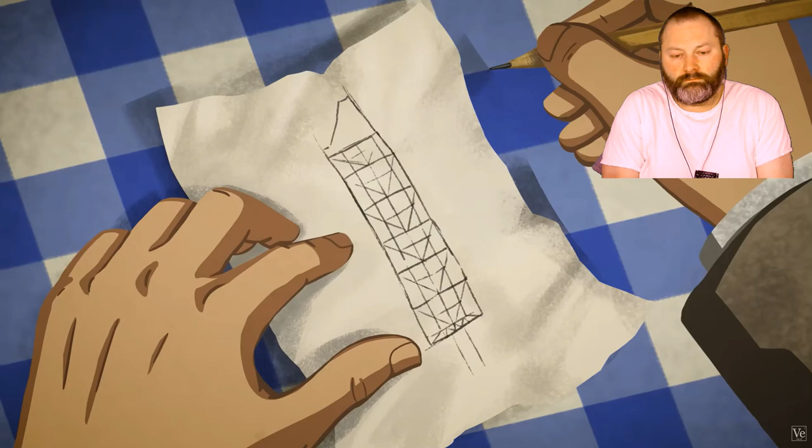a 17-ish minute video. This is Citicorp Center. In the summer of 1978, it had been open for less than a year when its structural engineer Bill LeMessurier made a terrifying discovery. His cutting-edge skyscraper, an engineering marvel, had a fatal flaw.

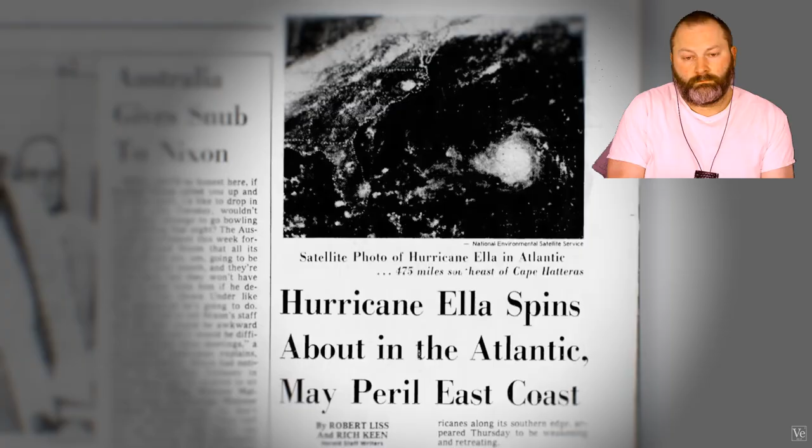Winds of just 110 kilometers per hour could cause it to collapse in the middle of Manhattan, potentially killing thousands. Over 200,000 people lived and worked in the surrounding area, and hurricane season was only weeks away. Here I am, the only man in the world who knew this.

This thing is in real trouble. LeMessurier faced a stark choice. He could stay silent and hope for the best, or he could try to fix it and risk professional ruin and mass panic. But Citicorp Center had a 100% probability of total collapse by the end of the century. How could he save New York from a near-certain disaster? And how was this allowed in the first place?

Veritasium producer and engineer Henry Van Dyke traveled to New York to investigate further. In the 1960s, the financial giant Citicorp was trying to build a new headquarters in Manhattan. Just down the street from their original headquarters was this entire city block, which was up for sale.

Well, everything except for this church, St. Peter's. So Citicorp came to the pastor, Ralph Peterson, and asked, 'What's it going to take for you guys to leave?' And he came back and said, 'We're not leaving. Anything that Citicorp builds has to involve the church as part of it.'

What the pastor wanted was for the church to have its own separate identity. So eventually they agreed on two things. One was to replace this old crumbling Gothic church with a brand new one, which you see in front of you. And the second thing was that the church had to be physically distinct from the new tower. In other words, it had to be completely independent. And again, most importantly, two-thirds of the space above the church had to be free and clear, had to be open.

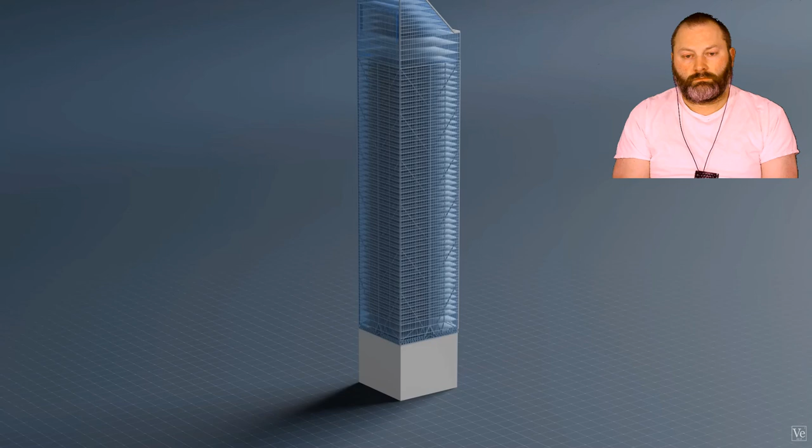The church needed to be in the exact same spot, and they needed to build the tower around it. If they were to maximize the floor area, they would have to notch out one corner of the tower for the church. LeMessurier agreed that could work, but why not notch 2, 3, or even all 4 corners, essentially constructing the skyscraper on stilts?

So it's probably the first time in history that an engineer has come to an architect and said, 'Let's make our job harder for us.'

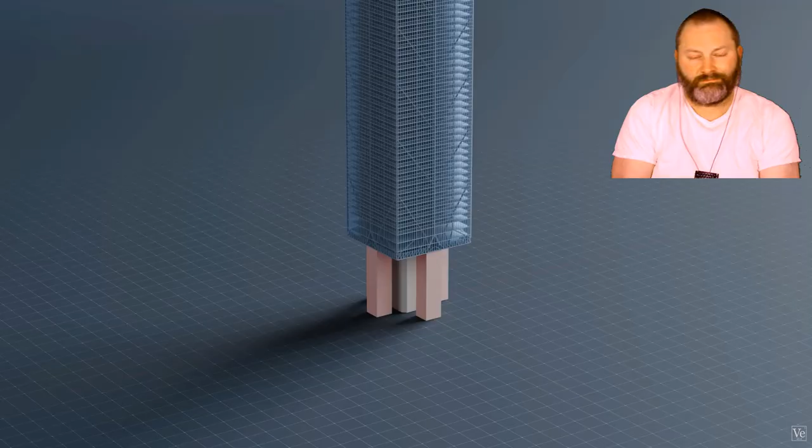The stilts would serve two main purposes. First, they would need to support at least half of the building's gravity load. The rest would be held up by a larger central column. Second, they would need to withstand the load due to high winds.

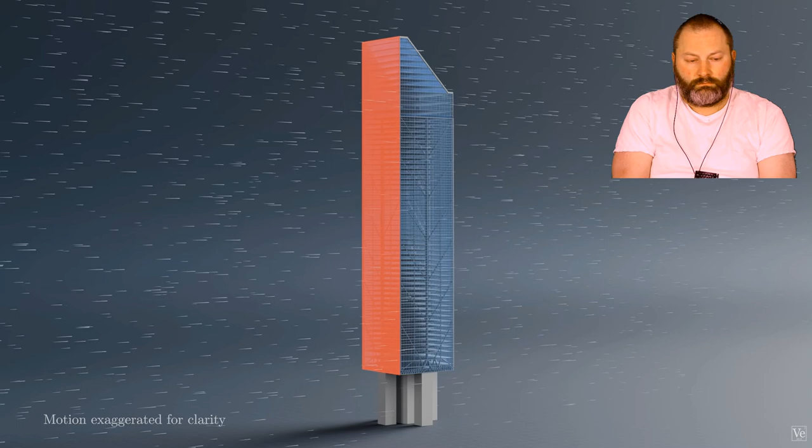But unlike an ordinary structure, the stilts wouldn't be at the corners. They would be at the center of each face. Imagine a chair, and instead of the columns or the supports on each corner of the chair, it's at the midpoint of each side. Obviously, it's not an ideal situation. It doesn't seem very stable. Exactly. So it created an engineering problem.

As LeMessurier considered the problem, he suddenly had a flash of inspiration. He grabbed a napkin and sketched out an idea. He drew 6 layers of diagonal braces up each face of the tower. These chevrons would transfer the forces to the middle of each face and down to the stilts.

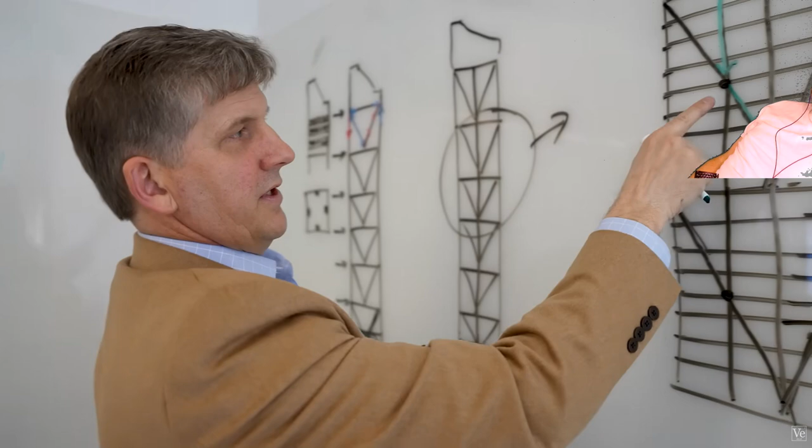Now we have to see the gravity loads, right? But now here's the trick. The gravity loads are coming down the column. When they get to the brace, they need to find their way into the brace. So what you do is you take out that column right there. There is no way that load can jump over and go to that column.

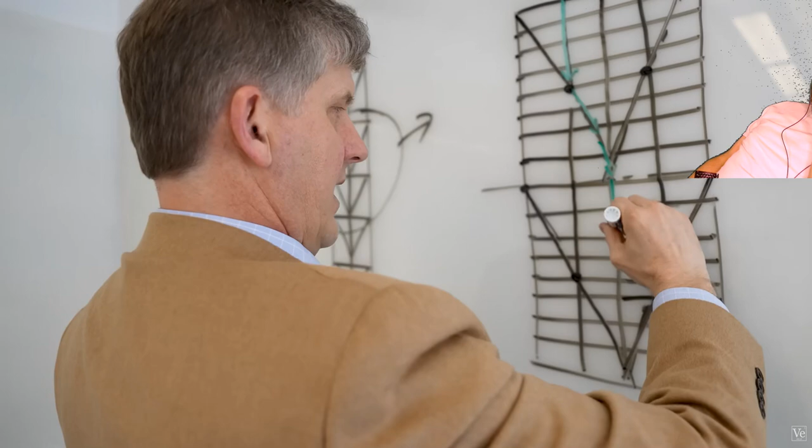And now they're coming down into the braces. They get down to the bottom here, and now they continue to go down. You take that column out, it has nowhere to go except into the brace. By removing the columns at the top and middle of each chevron, every tier acted as a separate unit. They were only connected to the braces and through the central core.

So every 8 stories, half of the gravity load would be forced through the chevrons to the mid-face columns, leading down to the stilts. This particular system was entirely unique, driven by the placement of the columns and the conditions of the building.

When wind hits the left side of a normal building with corner columns... Can I just say, I never would have thought about that. The fear to me is that removing something would make it less stable, instead of how they did it, where the angling forces it to become more stable, driving the stability through the areas where they've got it set up. That is just, I never would have thought of that. That's why I don't do this.

The frame deforms like this. So to reduce this deformation, we could strengthen these joints, but there's a better way. Because beams and columns are much stronger in compression or tension than they are with bending loads, if we add diagonal bracing, they can carry this horizontal load. The beams sort of act like springs, and when they're compressed, they push on the joints. When they're stretched, they pull inwards.

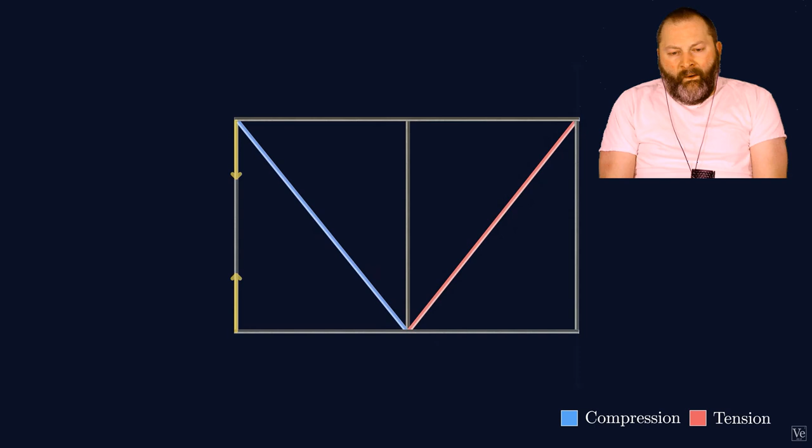With braces like these, the wind load compresses this diagonal and stretches this one. The left column pulls down in tension, and the right column pushes up in compression. Where the braces meet, they both push the bottom beam to the right. This stretches the left side and compresses the right one. But this floor is the top of the next chevron, so this lower section is carrying the force from the layer above it, and the normal wind load from the side. This keeps happening at every chevron, so the wind load builds up as you go down the building.

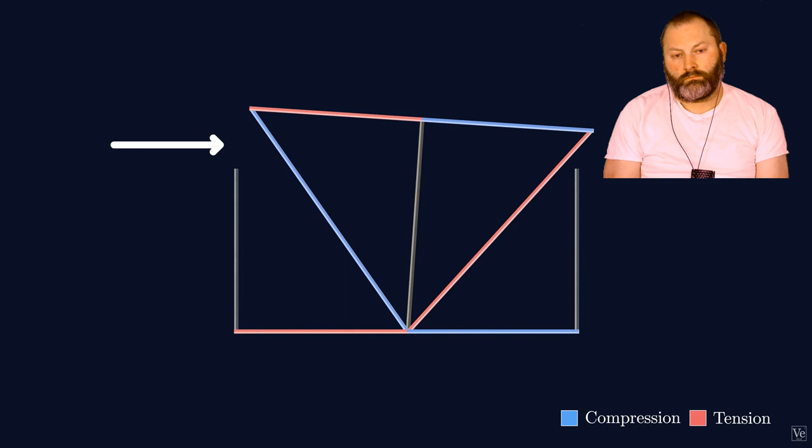But Citicorp can't have corner columns like this because of the gravity load. So in the wind, this entire triangle wants to rotate like this. To prevent that from happening, this chevron pulls down by going into tension, and the far chevron pushes up in compression. The top and bottom beams are again forced into compression and tension.

The wind load ends up wrapping around the entire building, so every chevron works to transfer the wind load to the section below. It's like every chevron is playing hot potato, just passing it along to the next one.

That's ridiculous. That's so cool. Completely ridiculous, because I would have never thought of it.

What is wind? If we made a skyscraper here, out of all these different things, you push with your phone, you get a certain amount of force. But then you push on my phone as well with a certain amount of force, and your phone is also pushing on my phone. And so that's the shear in the building, what we call the building shear.

It increases as you go down the building. At the 10th floor, you may have a smaller force than at the 60th floor, but the total force at the 10th floor is like carrying everything above it, so it's much bigger than what's going on at the 60th floor.

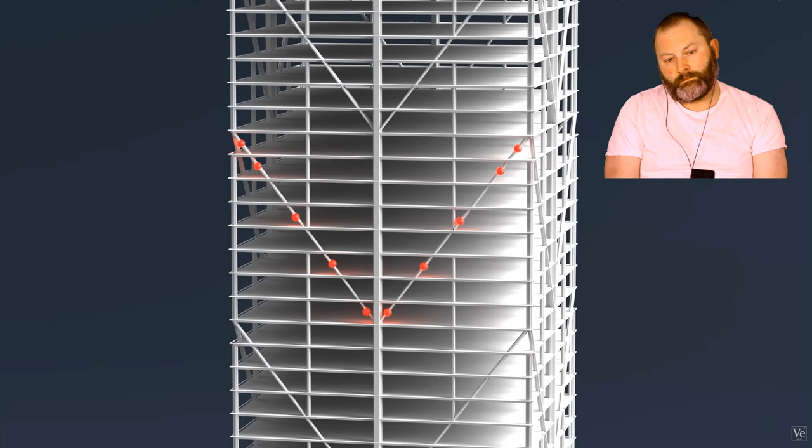So these chevrons were key to Lemessurier's design. But the braces were massive, almost 40 meters long end to end. Even if you could fabricate a steel brace that long, there would be no way to get it through Manhattan. So instead, it was sent in pieces to be welded together on site.

The chevron bracing solved the wind and gravity load issues, but it also created a different problem. Because of the chevron bracing system, they were able to save a lot of money and weight. It was a lighter construct than most other buildings in New York—I think it was 22 pounds per square foot, which is very light.

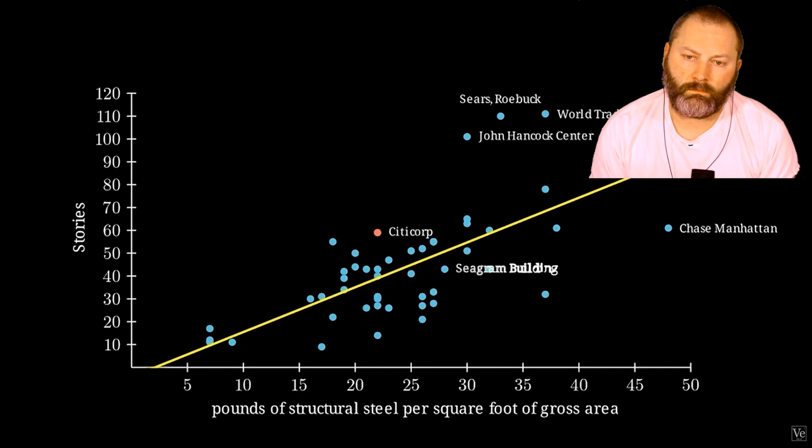Unfortunately, that made the building swayable. It could move in the wind. That wasn't necessarily a structural problem, it was just that it could have been uncomfortable for the patrons. One way to solve this was just to add more structural steel and make it a lot stiffer, but the solution Lemessurier came up with was far more elegant.

He adopted something that had been regularly used in bridges, power lines, and ships, but never before in a building: a tuned mass damper, or TMD.

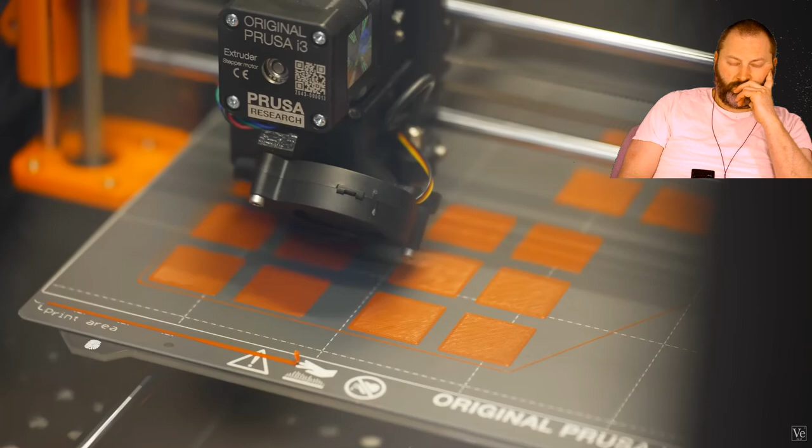So we're here at Stark Laboratories, and I'm not with Iron Man, but instead the Columbia Space Initiative, a student team on campus who has helped us build this incredible tuned mass damper kind of system. We'll use this cart to represent a building. By pulling it back and releasing it, we can excite its resonant frequency. Then we'll put on a little pendulum, an aluminum rod, and a mass at the bottom.

As the building sways, it transfers some of its kinetic energy to the pendulum, which starts to swing. Then some of its energy is dissipated through friction at the hinge. The pendulum and the building oscillate out of phase from each other, so every time the building pulls the pendulum in a different direction, more energy is lost, significantly damping the sway of the tower. But this system needs to be carefully tuned so it has the same frequency as the building itself and the right amount of friction.

First, the mass needs to be at least 1 to 5% of the building's weight to be effective, and we tune the frequency of the TMD by adjusting the length of the pendulum. I assume engineers do math around this, but we're just doing it by feel.

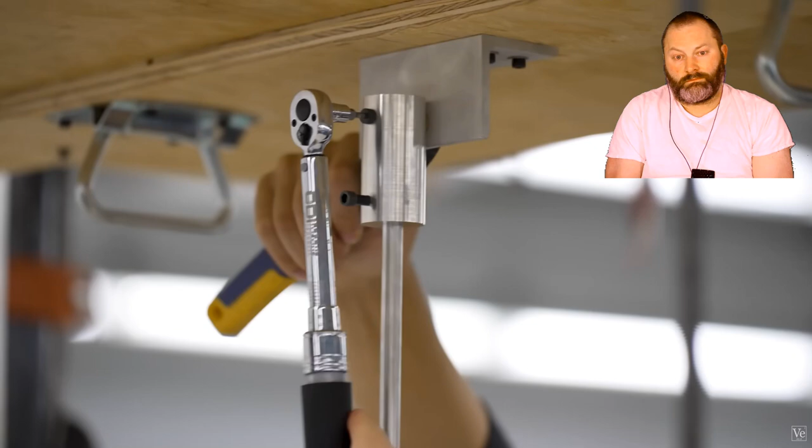Second, by loosening or tightening the bolt, we can tune the amount of damping. We need to dissipate more energy from friction at the hinge to stop the swaying faster. We just tighten this top bolt to add a little more resistance, and we'll see if we can dampen it further now.

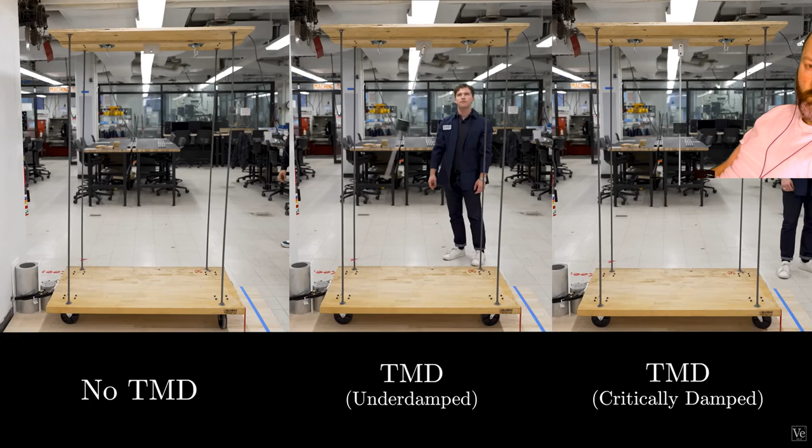Ooh, much different, yeah. That looked great. That was so quick. It is cool when an experiment works.

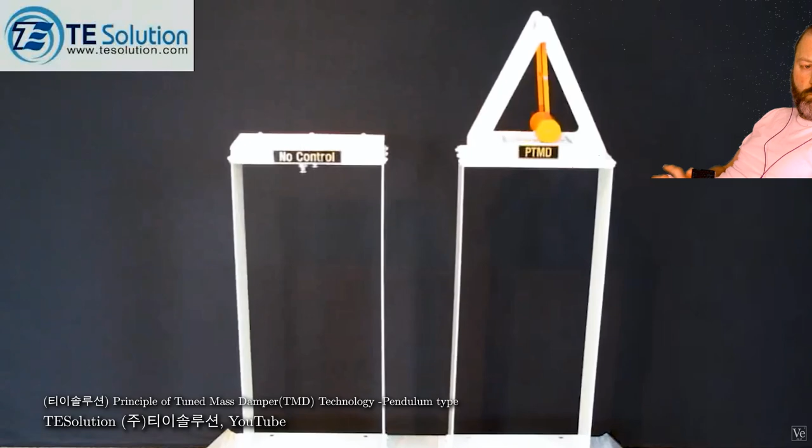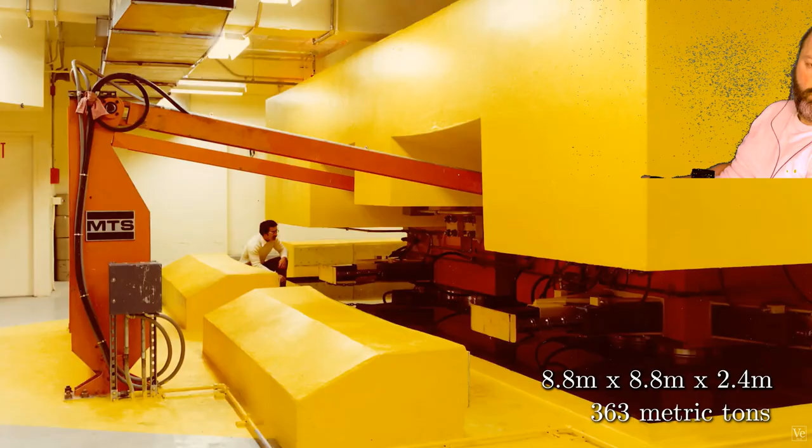It doesn't always happen. There are many different types of TMDs, like pendulums, liquid columns, and a large mass on springs. LeMessurier used this last one in Citicorp. What you see is a mass of concrete, 29 feet square and about 8 feet thick, weighing 400 tons.

It was installed on the top floor and is affectionately known as that great block of cheese. As Citicorp sways to one side, the block starts to move in the same direction. Some energy is dissipated through separate viscous dampers, and Citicorp's oscillations are damped as the block oscillates out of phase to the building's motion. LeMessurier expected the damper to reduce the amplitude of swaying by roughly 50%, and he saved around $4 million by not needing an additional 2,800 tons of structural steel.

With both the chevron bracing to channel forces to the stilts and the tuned mass damper to reduce sway, LeMessurier was convinced the building was structurally sound. On Citicorp Center's opening day in 1977, it was the 11th tallest building in the world, described by the press as an acrobatic act.

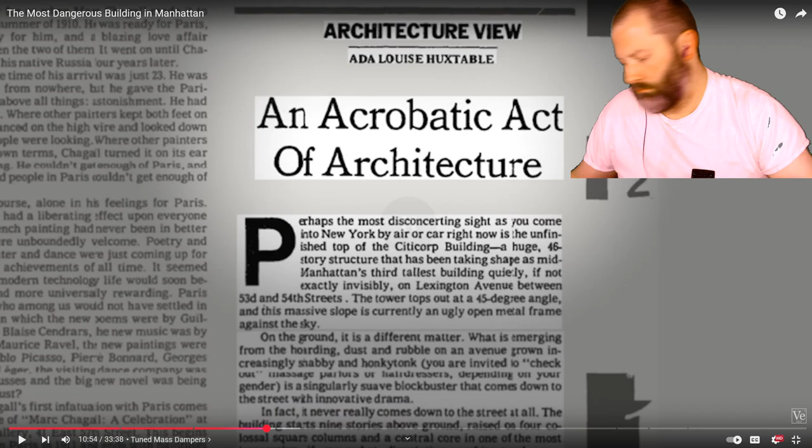Sears Tower, Trade Center, Empire State Building. What is this? Aeon Center? Ian Center? Must be what it is. I don't know, never heard of it. John Hancock. Okay, Chrysler Building. First Canadian Place. Never heard of that one either. 70 Pine. The Trump Building and Citicorp Center. Interesting.

Huh, 11th tallest building in the world. It was described by the press as an acrobatic act of architecture. Later, the American Institute of Architects even gave it an honor award, calling it a tour de force as a stylish silhouette in the skyline, and for the pedestrian, a hovering cantilevered hulk.

So then it's going swimmingly for years, right? Well, it's going swimmingly for about a year. But the first hint of trouble came in May 1978.

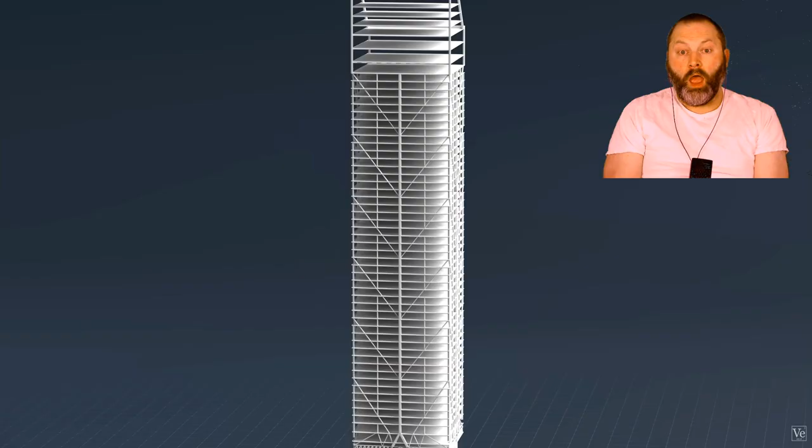LeMessurier was talking with another client about welding similar chevron braces. The architect and the steel fabricator said, 'Tell me, how did those welded braces work out? Seems like overkill,' they thought. LeMessurier says, 'Yeah, they were fine. Let me call my guys in New York and I'll check.' So he calls his office in New York and they say, 'Oh Bill, didn't you know? We bolted those connections.' The contractor had suggested saving $250,000 by using bolts to attach the braces instead of welds, and LeMessurier's firm had agreed.

There is nothing that says a bolt is inherently worse or better than a weld. You use them in different circumstances for different reasons. But it's a little surprising to find out — I thought the connections in this tour de force, one-of-a-kind skyscraper, on the cutting edge of structural engineering, was connected one way, but apparently it's connected another way.

But if the braces are going like this, where are they going to go? You only need the weld when the braces are going like this. Since the gravity load was always... I don't know. I understand what he's saying. Well, okay, listen, if it's not welded, then he sees an issue.

I would feel better if it was welded. I don't understand how they bolted them. Maybe they'll show it.

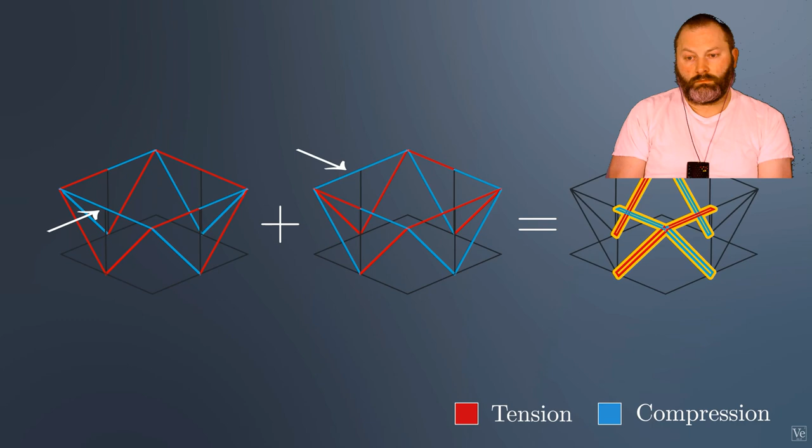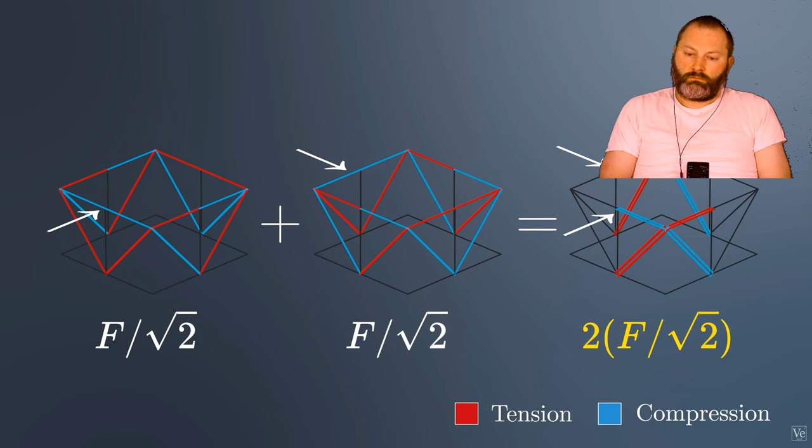But then he noticed something strange. Now we look at the diagonals - the stresses in half of them vanish, and in the other half, double. Since the force on each side was F over the square root of 2, these beams get double that. Compared to Lemessurier's calculations for the perpendicular wind load, the forces here were 40% higher.

So 1.4 by itself is not enough to wreak havoc, okay? It may be, but it may not be. So then the question is, well, what happens? This increase in forces wouldn't have mattered in the original design since the chevrons were fully welded together. But that wasn't the case anymore.

Lemessurier remembered his earlier phone call. The welds holding the chevrons together were swapped for bolts. How did his team calculate the number of bolts per joint? Did they consider quartering winds? It would be a miracle if they ever thought that through, to think about the diagonal wind. It just wasn't in the nature of anybody.

So I had a bit of a worry. I didn't panic right away, but I decided to go down to New York to my office. Lemessurier requested the building diagrams and pored over all of the connections. He looked at how his firm calculated the number of bolts. There was no question they had taken straight-on wind, not the diagonal wind.

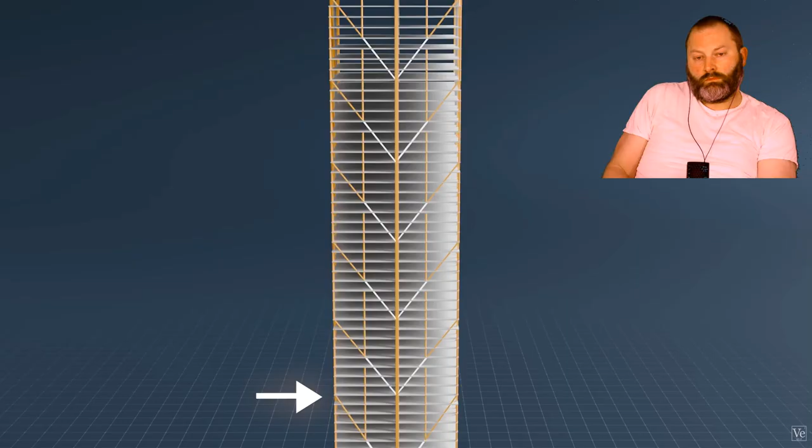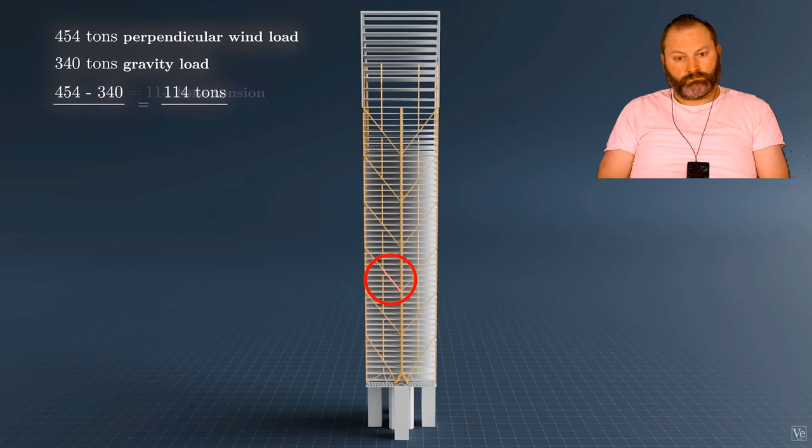Although wind speed is highest at the top of the tower, the wind shear builds up as you go lower. Looking at this brace around halfway down the tower, the perpendicular wind load is 454 tons. Because of the skipped columns, all of these braces carry the same gravity load, just 340 tons, from the 8 stories above. The gravity load builds up in the center column, not in the braces, which means there are 114 tons of tension in this brace. If each bolt can withstand around 28 tons, that would require 4 bolts. The original calculations said just 4 bolts were enough, so that was all they used.

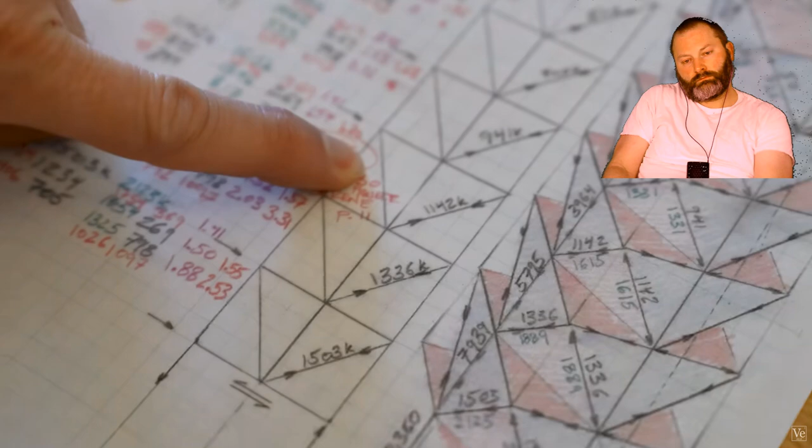But when he added quartering winds, Lemessurier's calculations showed there were some braces that needed far more bolts. At this particular part of the building, which I can show you on my calculations, is right about here. And Bill Lemessurier talked about the 30th floor. I always wondered, why was it the 30th floor?

The 40% increase from quartering winds means that this brace has a wind load of 635 tons. The tension in the brace is now 295 tons, over double the original calculation. So these braces actually need around 10 bolts, not 4.

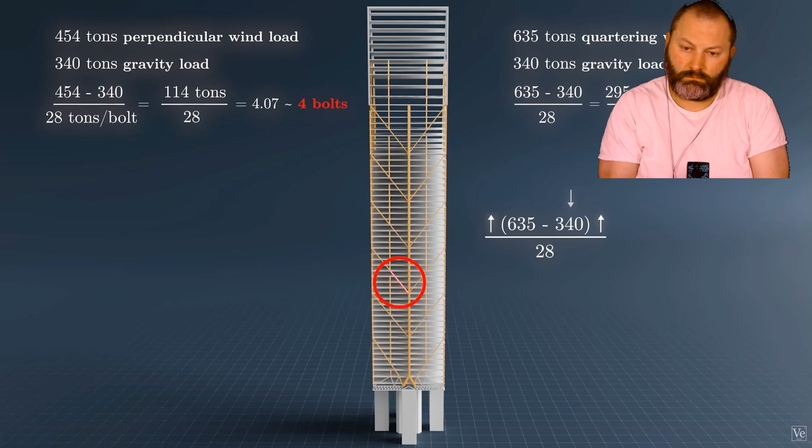But then it turned out they had done something else. Lemessurier's firm considered the braces to be minor structural elements. They didn't use the right factor of safety to calculate the number of bolts. They should have overestimated the tension in the brace by underestimating the gravity load. With only 75% of the gravity load, the tension in the beam is now 380 tons. So they really needed 14 bolts, but they used only 4.

We're going to end it right there on a cliffhanger. This is awesome. This video is awesome.

Granted, if you leave the calculations up to me, we would have used 1 bolt, and I would have said, I think this'll do it. So that building would have come down within a week if it went that long. So you never want to listen to me when it comes to building things.